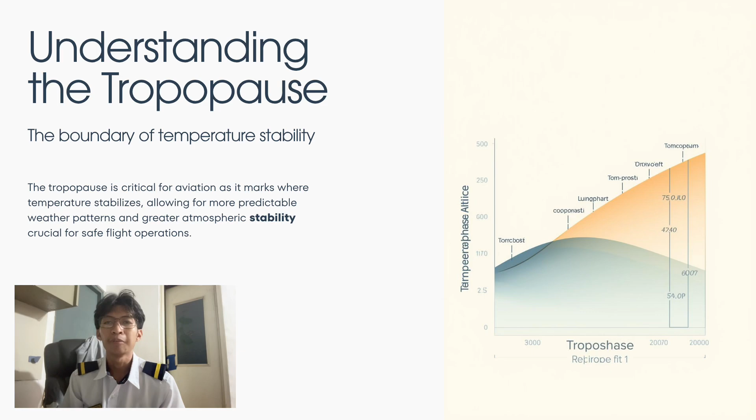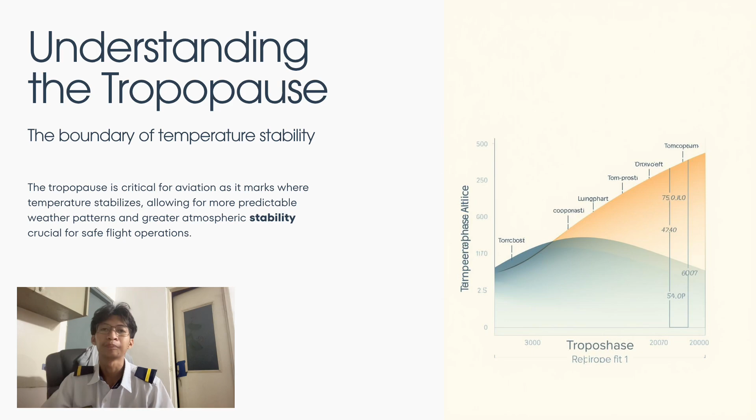The tropopause is the boundary between the troposphere and the stratosphere. This layer is vital for aviation because it separates turbulent weather below from calm, stable air above, helping ensure smoother and safe flights. The tropopause is the atmospheric boundary found at around 36,000 feet, the point where the troposphere ends and the stratosphere begins. Jet aircraft often cruise near the tropopause because it offers a stable temperature layer that reduces turbulence and ensures smoother, more comfortable flights.

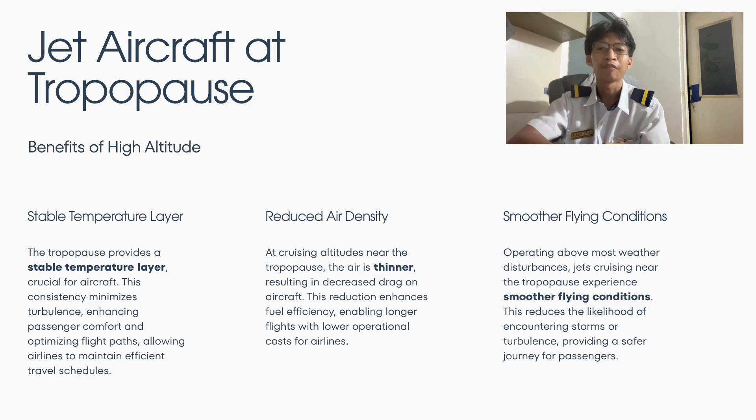At this altitude, the air is thinner, which means less drag and better fuel efficiency, allowing the airlines to fly farther while saving on cost. Flying near the tropopause also keeps jets above most weather disturbances, providing safer and more efficient travel for passengers. The tropopause is a great cruising altitude for jets. It has stable temperature that improves fuel efficiency. Flying there avoids turbulent weather below. This makes flight smoother and more efficient.

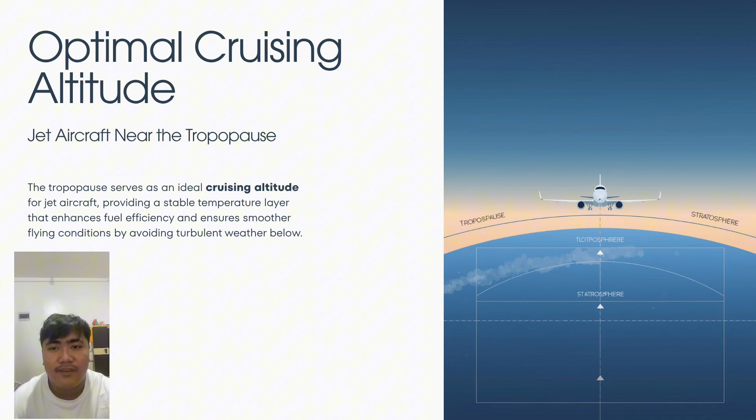The tropopause marks the top of the weather-active layer in the atmosphere. Temperatures stop dropping and stay steady there. Jets benefit because engines perform better in stable conditions. Thinner air at this height reduces drag on the aircraft. Less turbulence means a more comfortable ride for passengers. Overall, flying at the tropopause saves fuel and improves safety.

At high altitude, the air is thinner, which means there are fewer air molecules pushing against the aircraft. This reduces drag or air resistance, making it easier for the plane to move forward. Jets can fly faster without using more fuel. This helps them save energy and fly more efficiently. Next is optimized engine performance. Jet engines work best in thinner air found at high altitudes. The thinner air helps the engine run more efficiently using less fuel. Because of this, jets can fly longer distances without needing extra fuel.

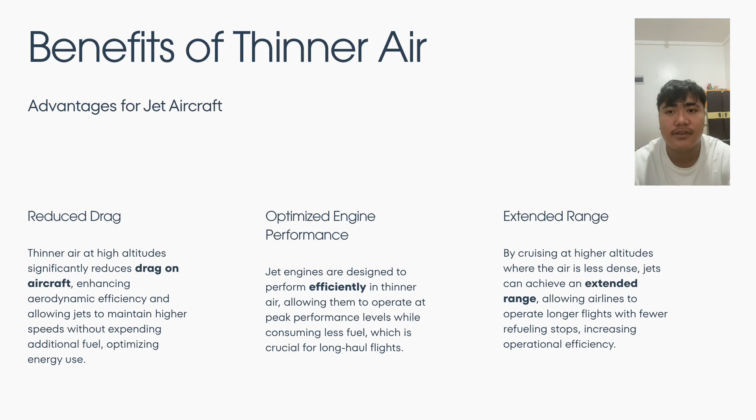Next is extended range. By cruising at higher altitudes where the air is less dense, jets can achieve an extended range, allowing airlines to operate longer flights with fewer fueling stops, increasing operational efficiency. Fuel efficiency at altitude: how thinner air benefits aircraft performance. This explains how flying at higher altitudes improves aircraft fuel efficiency. At higher altitudes, the air is thinner, which reduces drag on the aircraft. With less drag, the engines don't need to work as hard to maintain speed, leading to significant fuel savings. Jet engines are designed to perform efficiently in these conditions, allowing planes to travel longer distances using less fuel. This efficiency is crucial for sustainable aviation practices, reducing both operation costs and environmental impact.

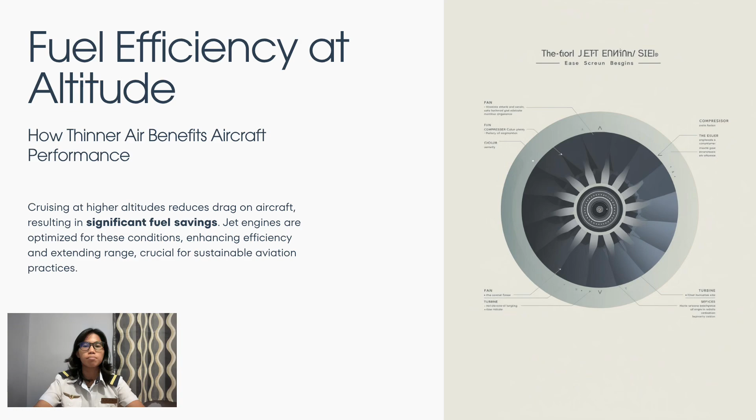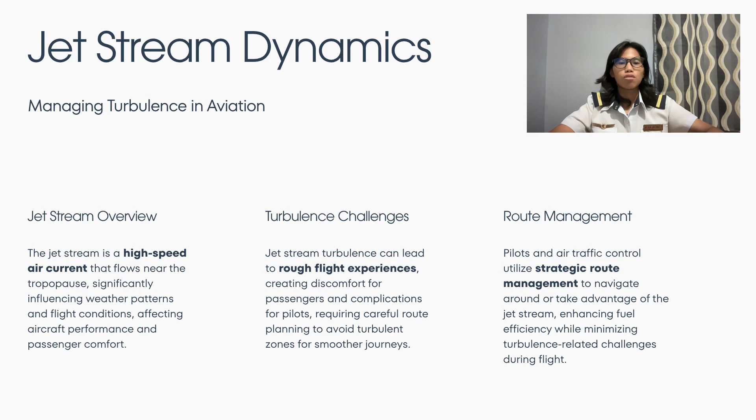Jet stream dynamics: managing turbulence in aviation. This discusses the behavior of jet streams and how they affect aircraft flight, especially turbulence and route planning. Jet streams are high-speed air currents that flow near the tropopause, around 30,000 to 40,000 feet. They influence weather patterns and flight conditions. Turbulence challenges: these fast-moving air currents can cause rough flight experiences, creating discomfort for passengers and challenges for pilots. Route management: pilots and air traffic controllers use strategic route planning to either take advantage of or avoid jet streams. Using them can boost speed and save fuel, while avoiding turbulent zones helps maintain safety and comfort.

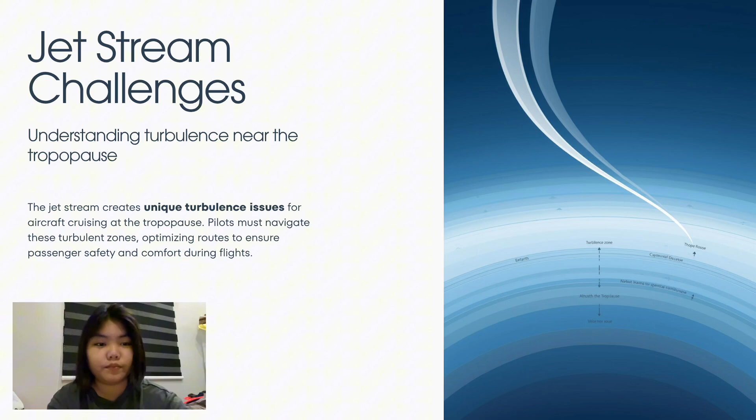Jet stream challenges. This slide explains the difficulties pilots encounter when flying near the jet stream, especially around the tropopause. It highlights that the jet stream can cause strong turbulence, making it challenging for aircraft to maintain smooth and safe flight. Pilots need to plan and adjust their flight path carefully to reduce the effect of turbulence and ensure safety and comfort for everyone on board. And this slide emphasizes that understanding the tropopause is crucial for safe and efficient aviation operations. Knowing its behavior helps pilots and meteorologists manage turbulence and optimize flight performance worldwide.

The first one is pilot: flight performance and handling. At around 36,000 feet, near the tropopause, our aircraft performs very efficiently. The air is thinner here, which means there's less drag on the wings and fuselage, allowing us to fly faster and use less fuel. The engines also operate efficiently at this altitude, giving a good balance between speed and power. However, I must stay alert for turbulence, especially near the jet stream, which can cause sudden bumps or shifts in airspeed.

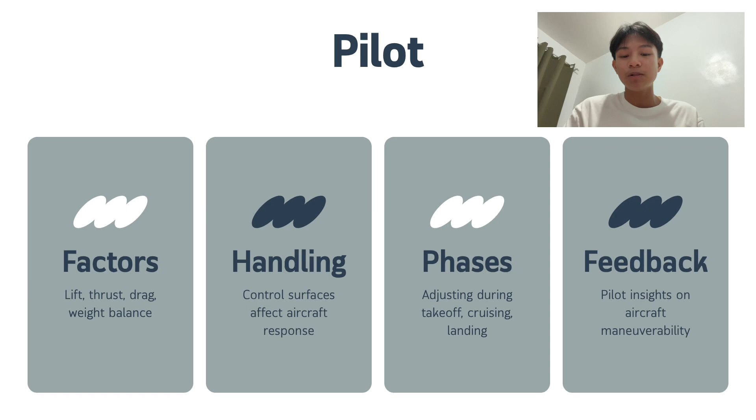Second is meteorologist: weather conditions. At the tropopause, the temperature stops decreasing with altitude and becomes almost constant. This layer separates the troposphere, where most weather occurs, from the stable stratosphere above. Because of this stability, flights near the tropopause usually experience smoother conditions. However, strong jet streams often form near the boundary, which can cause turbulence or rapid changes in wind speed and directions.

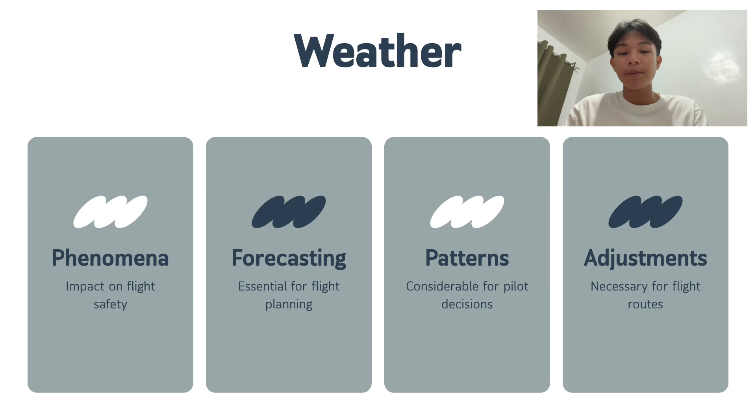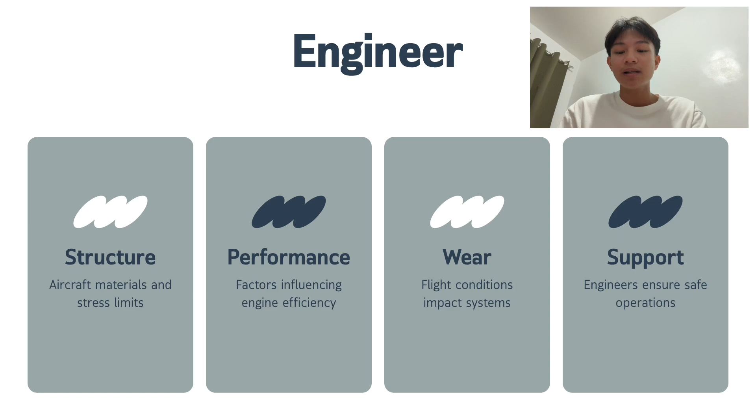Next is engineer: aircraft and engine implications. Flying near the tropopause offers optimal engine performance. Jet engines are designed to operate efficiently in thin, cold air, reducing fuel burn and engine wear. The reduced air density also means lower aerodynamic drag. However, thinner air provides less cooling for some components, and exposure to jet stream turbulence can slightly increase structural stress, so systems must be designed to handle this condition safely.

And lastly, passenger representative: comfort and experience. At cruising altitude around 36,000 feet, passengers enjoy a smoother and quieter flight because we are above most weather disturbances like thunderstorms and clouds. The stable air provides a calm cabin environment, helping reduce motion discomfort. Occasionally, passengers may feel mild turbulence when passing near the jet stream, but this is normal and brief. Overall, it is the most comfortable altitude range for long flights.